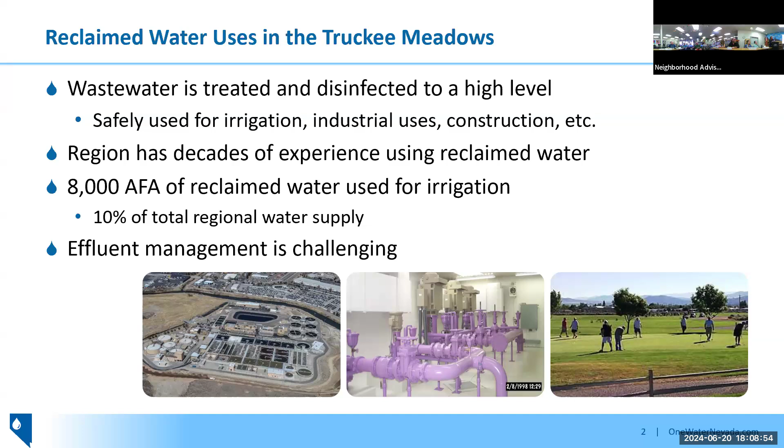In 2016, new regulations were passed. Nevada Division of Environmental Protection down in Carson City regulates wastewater, drinking water, and reclaimed water. There are different classes of reclaimed water, the purple pipe, category A through E, which reflect different types of treatment that can be used for different things based on their level of treatment.

In 2016, they introduced a category A+, which is advanced purified water. Really, it's where you start with reclaimed water and put it through several advanced treatment processes, and it turns into drinking water. This is not new, it happens all across the country.

In Nevada, our regulations require an environmental buffer, also known as indirect potable reuse, a phrase you may have heard before. That environmental buffer means after we treat the reclaimed water to drinking water standards, we have to store it underground. So that water is then injected into an aquifer where it can be stored for years before it's needed to be pulled out.

And so many cities along the coast also use this for seawater intrusion, where they put this clean water underground to create a barrier to save their drinking water wells from pulling seawater in. So there are different types of uses of injecting this water into the aquifer, but you get natural treatment from Mother Nature, and it's just a great environmental buffer.

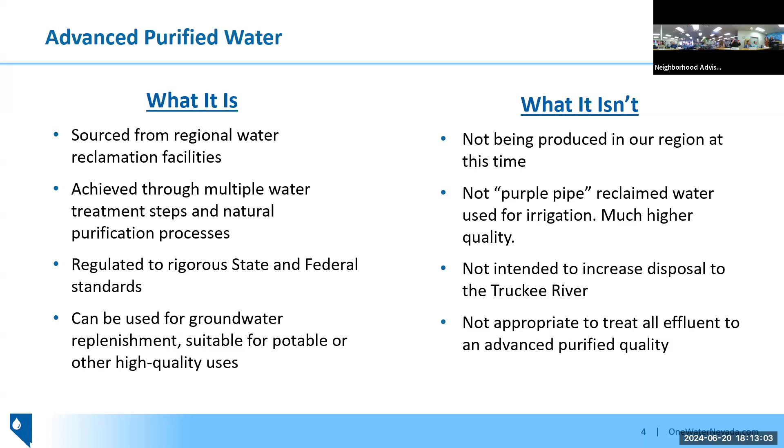If you've been to Disneyland, you drank the water, if you drank out of the water fountains there. And they have one of the largest programs in the United States where they treat a huge amount of water, 150 million gallons per day, and put that underground. And for reference, if you think of the whole city of Reno area in the hottest part of summer, how much water our community uses in one day, that's how much water Orange County is treating and putting underground every single day. So that's kind of a reference for you.

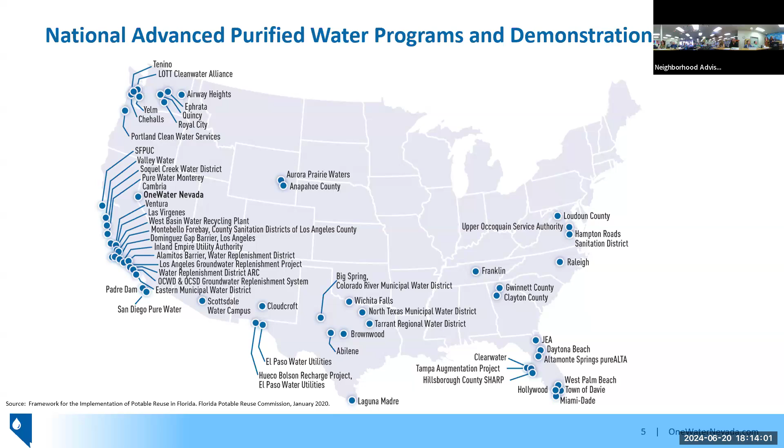So I want to talk about One Water Nevada. One Water Nevada formed with a group of all the different agencies: Truckee Meadows Water Authority, City of Reno, City of Sparks, Washoe County, and the University of Nevada, Reno, with our water planning commissions. And we came together several years ago to look at our water resources and how we can manage water and wastewater in our region and work together as a team.

So this is just one project that we're working on, but the Advanced Purified Water project actually began back in 2008 when the City of Reno began piloting this type of technology at the Reno Stead Water Reclamation Facility.

This was several years ago and really was groundbreaking for the type of technology and the industry. So now fast forward to 2017, we came back together to look at advanced purified water.

We have the regulations now. Will it work for our region? So we had these really cool pilot trailers set up. We had 3 of them, and we were taking the reclaimed water from Reno Stead, putting it through all 3 of these trailers, and at the end we had drinking water. We actually had a well on site that we could inject down into and pull back out and do the whole project. It's small scale, maybe 5 to 10 gallons a minute, like a garden hose or two, but it gave us a lot more control.

We ran this for about 5 years between Washoe County's South Truckee Meadows facility and then at Reno Stead. It actually was the first Category A+ permit in Nevada, and that was a big deal, that we were able to get the first permit with all of the strict water quality goals.

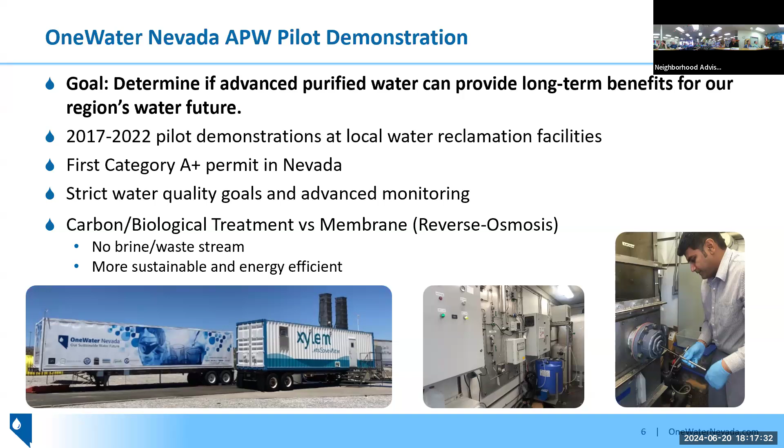So we completed the demonstration of that 5-year study in the pilot trailers. Now we are looking at a full-scale facility. This is envisioned to be Nevada's first Category A+ large-scale facility. We are working very closely — TMWA is a joint venture with City of Reno, looking at the Reno Stead facility as that source.

The conceptual rendering there is the facility that we are currently in design for, and that would be located just across the street from Reno Stead. There's an empty lot on the corner of Military and Lear. So this project, again, is in design.

It's not a cheap project — it's $220 million. But if you saw on the news last week, we are very fortunate to get a Bureau of Reclamation grant for $30 million awarded, and that was the max amount we could have been awarded. I think they only awarded about 85 million or so to the entire United States, and we got 30 of that. So that was very impressive, and it made us feel that they believe in the project and see the use for it just as much as we do.

The last thing is why we chose this site — you have to find a suitable aquifer. You can treat the water to drinking water, but if you have nowhere to put it underground, that's a problem. So you have to find an aquifer that can handle that amount of water and doesn't have naturally occurring arsenic or nitrate in it, otherwise you create this clean drinking water and put it underground with arsenic and now your water's contaminated.

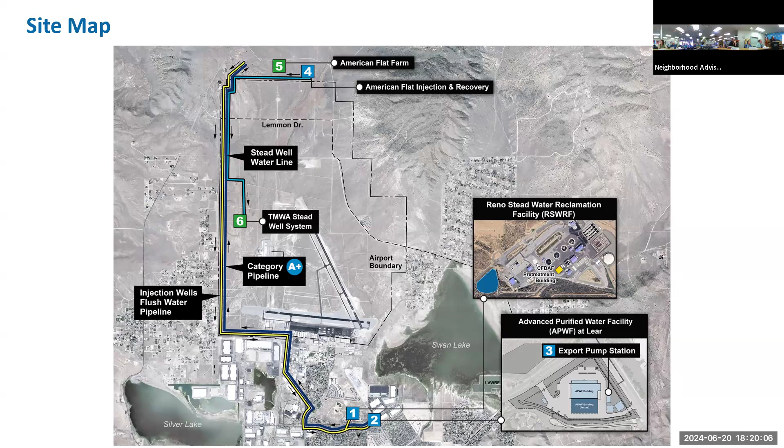So I could talk about this project and really get into the weeds, but the technology is there. We've tested it, other utilities across the country have tested it, and it's not a new technology. It's newer than membranes, but we've been working really hard with the University of Nevada, working with us to help with that research and help us with our sampling plans.

What's the current kind of research in the industry like? It's really nice having an unbiased kind of research capacity there, working with Dr. Krishna Pagilla. And then we also have this independent advisory panel.

These folks are engineers, hydrologists, public outreach consultants. We've got folks who actually worked on passing California's potable reuse regulations many years ago. So we have experts from around the country to help us with different components of our project, telling us, well, you need to bolster up this part, or here's advice for that, and then they tell us where they like our approach. It's been really nice to have an unbiased group of folks who have knowledge and have seen what can cause a project to fail, or seen what really can accelerate a project.

So again, the technology is there, but it's working with the public and getting that message out there and educating them, because we understand if the public hears about these types of projects, they can immediately think, ew, I don't want to drink that. So it's just about showing them the technology and showing that it is safe. There's several different processes and barriers for that water to go through, and it's very clean and very pure at the end.

One comment to add: on the conceptual rendering, we've had several public meetings out at the airport, and one of them was kind of a pre-game before the actual required meeting, where we went to talk to the neighborhood and all the neighbors and work with them on the trees, the lighting, the driveways. We decided to have one before it was required because we're starting the design.

We want to make sure we're heard and that we're not putting a facility out there that's hopefully not going to be an eyesore. We're working really hard to have it look very nice. We'll have a community outreach center that schools and different groups can come to, all about water, with hands-on discovery museum type exhibits. We're trying to make it a community type of area.

Jared Souther for the record.

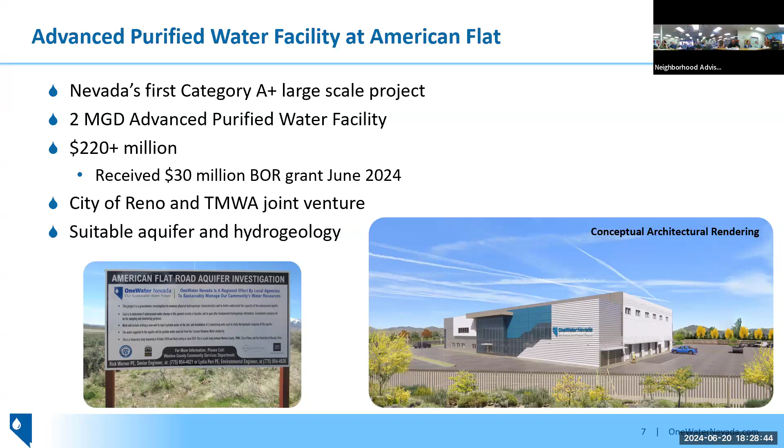One thing at the beginning of the presentation, we're talking about reclaimed water. I don't see much availability for that in the North Valleys. I see more of the South Meadows area being used. Is there a possibility for more increased use of reclaimed water as well?

Yeah, the reclaimed water is great if you have the customers for it. A lot of homes and apartments are being built, which creates more wastewater flow coming in, but you don't necessarily have a customer on the back end. So that can be the challenge with reclaimed water — if you don't have enough customers, where do you put it? In this scenario, it goes to Swan Lake.

Another huge benefit of this project is it's taking flows out of Swan Lake, creating a drinking water resource, and storing it underground. So that can help manage those flows as well. I don't want to speak for Reno on the reclaimed water customers, but I don't know what projections you have for how that reclaimed water customer demand will go up over time.

Yeah. So with the City of Reno right now, even though we do have reuse in the summertime, looking on an annual basis, about 25% of the water that comes into the facility becomes purple pipe water, and the rest actually goes to Swan Lake. That's mainly because in the wintertime, that can't go to a reuse customer.

And in the shoulder seasons, there's less use. So you really have the summer season as the primary use season. The rest of the time, Swan Lake is the primary discharge location. That's why this facility is able to create a water resource, utilizing this water not just once, but creating a potable water resource that then gets stored in the aquifer. I don't know if that answers the question.

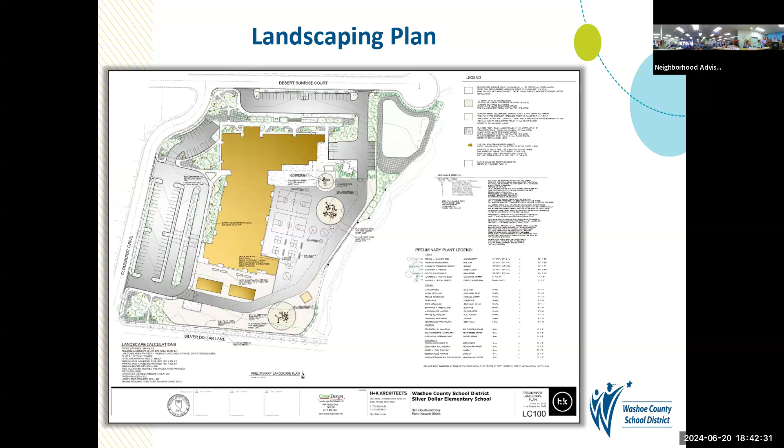This shows the site plan of how it sits on Silver Dollar, the same type of layout as in the past. We fit these schools in between 8 and 10 acres, depending on how much we get.

I think that's pretty much it—oh, there's renderings of what the school will look like. These renderings show the colors chosen to match this area, so it kind of fits right in, with no real bright colors sticking out.

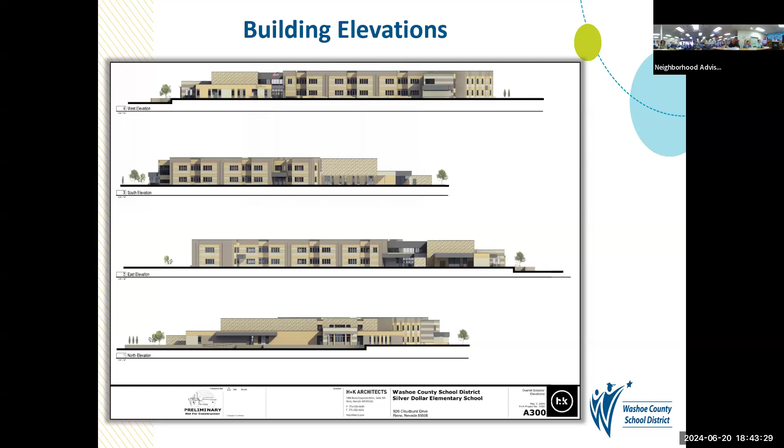We're very excited to bring another school to this area. We think Stead Elementary School really needs it for the students—new STEAM labs and everything educational has been upgraded since that school was built in 1958. I think it's just time for that community to get a new school. That's it right there—does anybody have any questions?

Start with anyone from the board with questions for this. Kathleen Egan: I wasn't going to say anything, but for the record, can you remind the public and us to share with our neighbors how the county acquired this land to build this wonderful new school for our community? I'm going to let Kyle take that one.

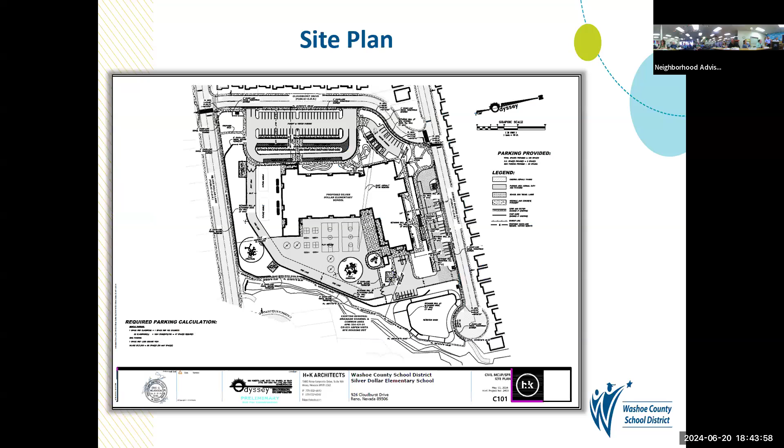Yeah, so this site—if you want to go back to the vicinity map—this site in the Silver Dollar community was dedicated with the Silver Dollar tentative map back when that community was originally planned a long time ago.

About 7 or 8 years ago, we acquired it through a dedication and purchased it basically through a trade with the developer at the time, D.R. Horton. So to answer your question, that property's always been sited for a school before the Silver Dollar community was ever there.

Which was, for those of us on the NAB and CAB at that time working with the planning commission, everyone went through the process of working with developers to create that space. Very much appreciated. Glad we finally get to it. You've been waiting long enough.

Just real quick, did you say it was donated by D.R. Horton or purchased? We purchased it. Okay, okay.

Rebecca, Planner, for the record. What is going to happen with the old Stead Elementary School? Yeah, we still have not come up with a plan on what we're going to do with that site yet. That is part of the FMP, deciding what happens to the schools that we shut down.

It could be a pre-K center, since this area kind of needs a pre-K kind of center. That could be an option. Nothing is set in stone on what it's going to be. We don't plan on tearing it down. We plan on fixing it up and trying to make it something we use, but nothing as big as hundreds and hundreds of students.

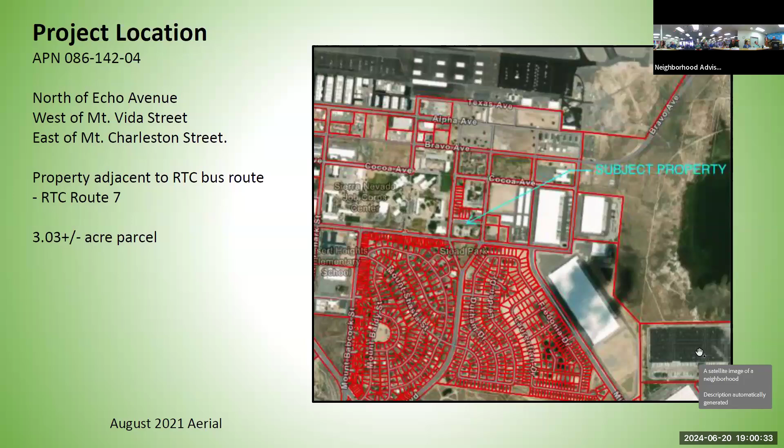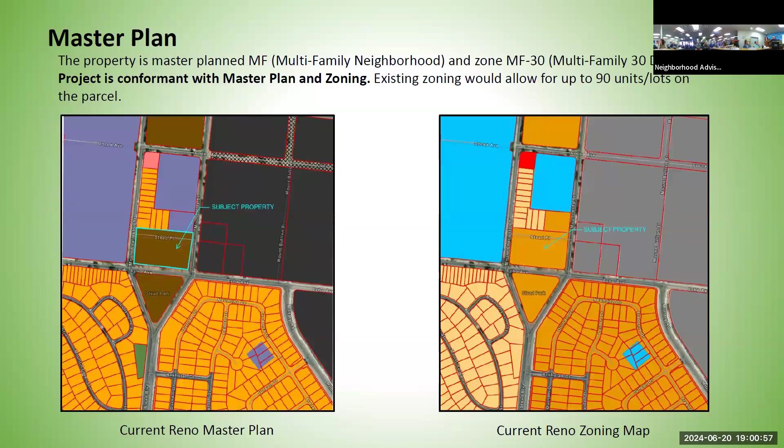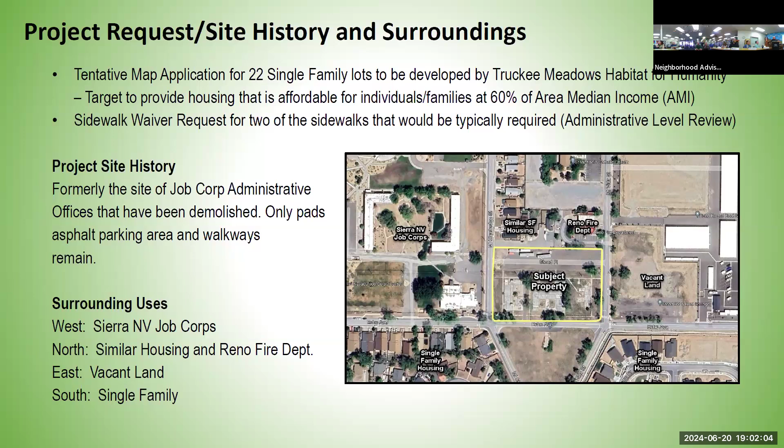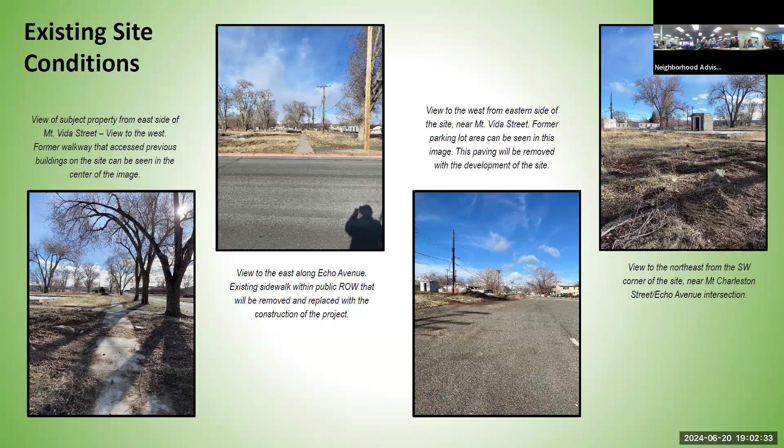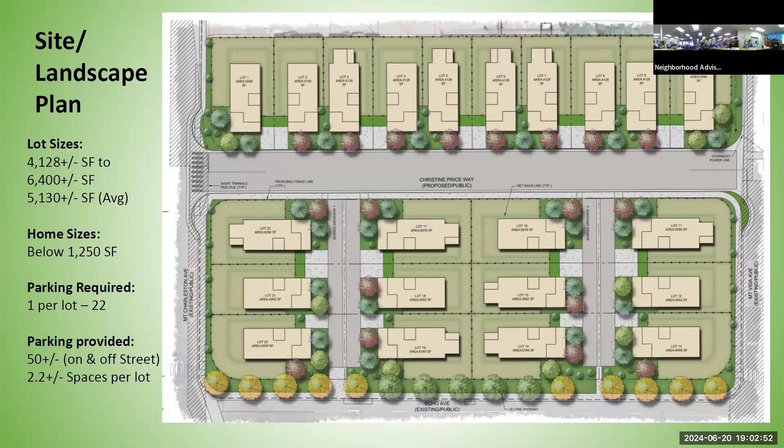Next slide, please. Here is the proposed preliminary site plan with landscape plan. Our average lot size will be about 5,100 square feet. Our home sizes will be below 1,250 square feet. We are going to be providing about 50 parking spaces in total interior to the site, including driveway parking on the lots and street parking.

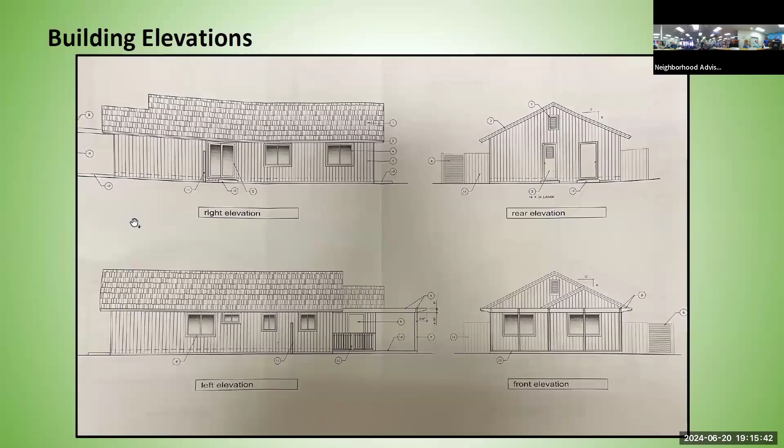So would it still be in front of the homes? Could there be a sidewalk in front of the homes? Not that one—if you go back to the slide, it looks like there isn't one. There's one across the street, but we were... well, I guess what I'm asking is, is there any reason

with parcel configuration or lot sizes that is causing you to design it without a sidewalk? So yes, it does—the site is actually really tight based on the current architectural plans Habitat is working with. If we added another 5 feet, we would be losing at least 4 parcels. So that's something to take into consideration.

So essentially, what you'd do is add the sidewalk in, the street would push down, and lots 11, 18, 17, and 22—the ones along that street—would have to go away. We can't, because we don't meet setback requirements. So it's not just about connection, it's about configuration.

That makes sense. Okay, thank you for explaining that. I had a feeling it might be more involved. And did you choose to do single family homes instead of something like condominiums? It's kind of nice to give them... and there is a sidewalk on one side, so—because I'm also sympathetic to bike riding, I have littles too, but I also would like people to have homes.

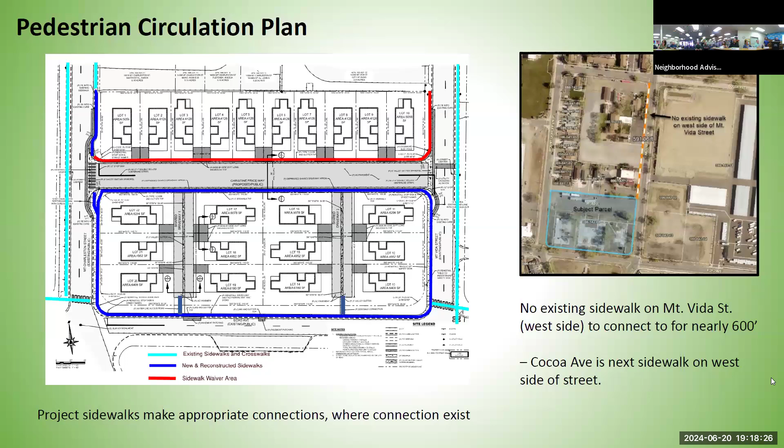Thank you. All right, any other questions from the board? Corey Bond in the public, would you like to make a comment or question regarding this?